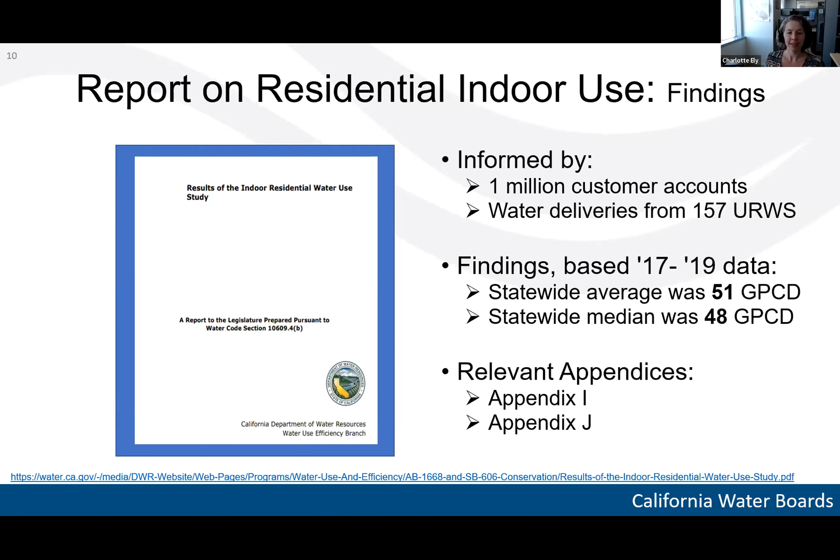Here, just quickly showing the recommendations made by the department and the State Water Board: that urban water suppliers would achieve an indoor water use efficiency standard of 55 gallons per capita per day by 2020, declining to 47 gallons per capita per day by 2025, and 42 gallons per capita per day by 2030 and beyond.

Before passing the proverbial mic to Joe and Peter, I wanted to recognize that regardless of what happens with AB 1668 and SB 606, wastewater collection systems and treatment facilities may continue to experience lower and more concentrated flows due to code standards and behavioral change.

Californians are expected to use water more efficiently indoors based on the 2017, 2018, and 2019 data that the department considered in the analysis. They projected that water use would continue to fall due to passive conservation, estimating that half of California would be at 44 GPCD or less by 2030.

An important consideration when thinking about that forecast is that passive conservation does not take into account the effects of existing conservation programs or of the actions people take when responding to a drought emergency. Some of those responses do lead to permanent indoor water savings.

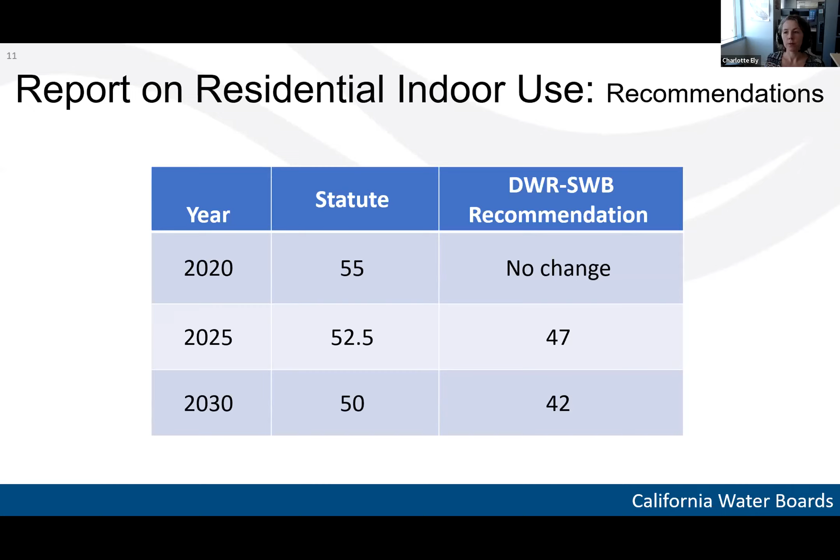And with that, I think we can move to the next slide. Peter and Joe, if you could introduce yourselves, that would be great.

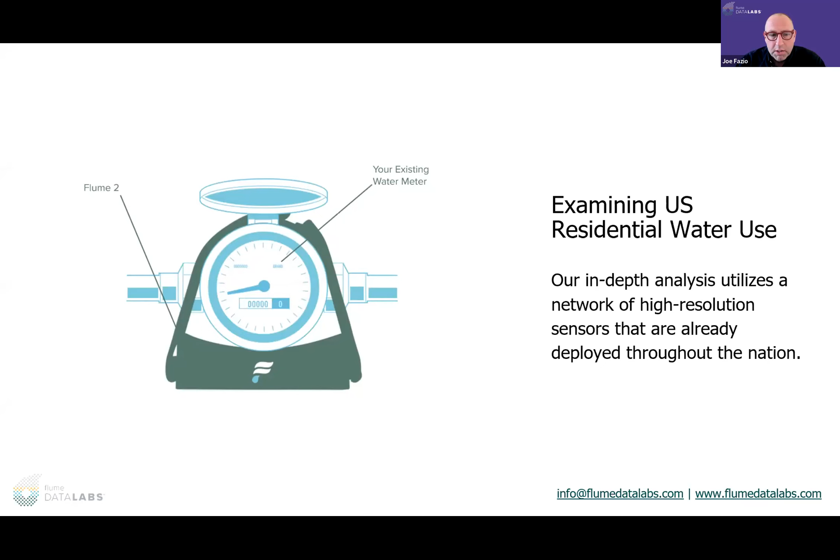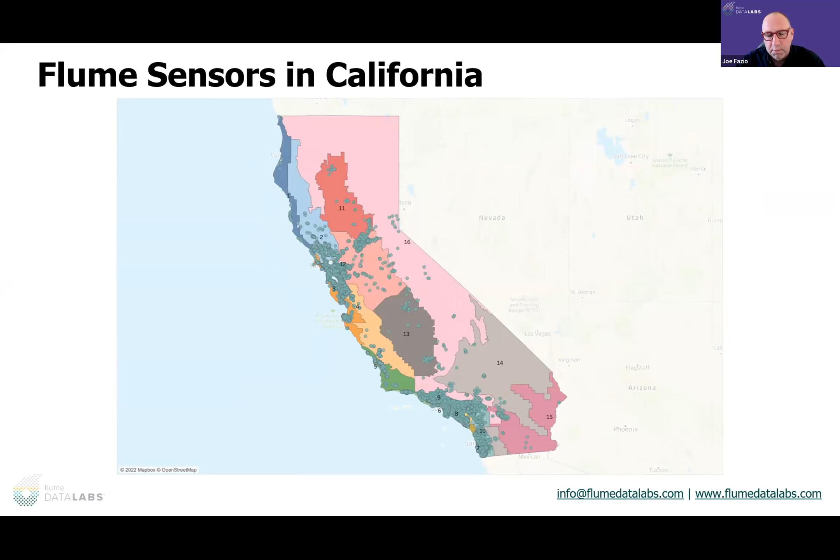Now that we have a lot of these flumes deployed all throughout California, over 15,000 flumes across the state, we can start to look at trends. These blue dots on the map show the concentration of flumes. We have high concentrations along the coast, since that's where most of the population is, but also good representation in Central California and in less populated areas. The different colors represent the different climate zones, and we have really good representation all throughout California, pretty representative of where the populations actually are.

So let's look at some of the data we're getting. It's important to look at California's average water use, but I think this slide tells the story better of what's going on with indoor water use in California. It turns out people in Los Angeles use water differently than people in San Francisco, and have different water use habits than people in Riverside.

So we mapped 3 different metro areas: Los Angeles, Riverside, and San Francisco. When I say Los Angeles, I don't mean the city itself, but the whole metro area including a lot of the outlying cities. Same for Riverside and San Francisco, which includes the Bay Area and Marin County. For each of those 3 metro areas, we plotted the average indoor water use per capita.

This is since basically the end of 2019. Along the y-axis is indoor GPCD, some of the numbers Charlotte just presented on her past slide, kept in the same units. On the x-axis is time, ranging from the end of 2019 to the end of March 2022, basically the end of the first quarter. These curves are pretty similarly shaped, however the magnitude is actually different.

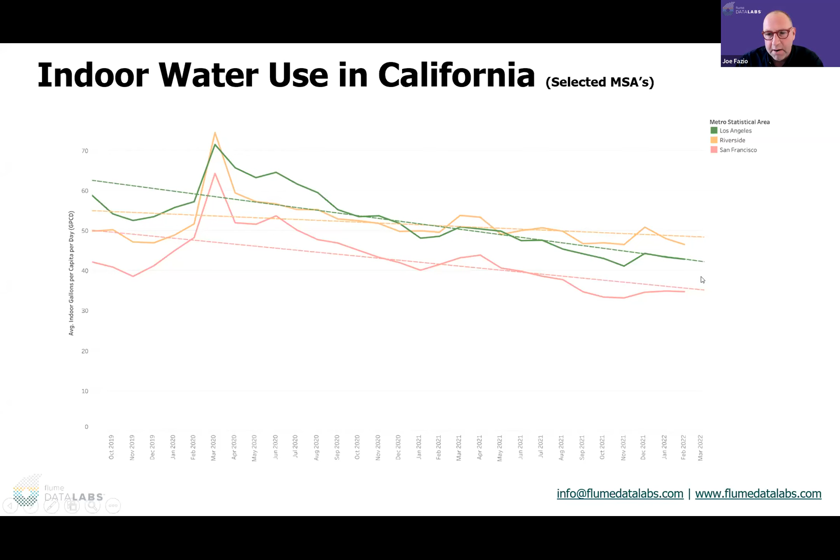Yeah, and I think this number has been driven down a little bit too, Peter. We have, as I mentioned before, a lot of these utility programs where there's severe drought pressure, especially the end of last year into the beginning of this year. And there was a lot of mandatory drought restrictions for people that actually do have flumes. So I think this is a little bit reflected here, but overall, we are seeing that this indoor GPCD is coming down across all geographic California.

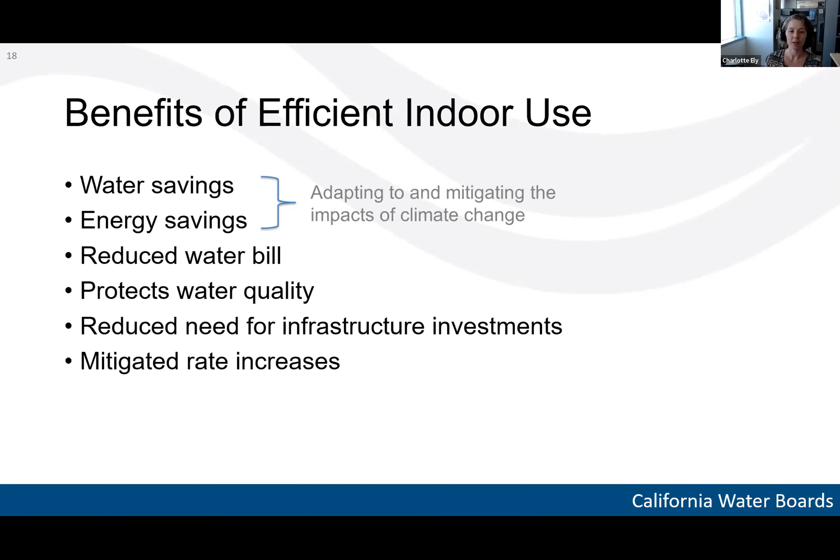So just in providing a quick overview of what this analysis did, I wanted to show what we evaluated and what we did not evaluate. And when I say we, I'm speaking on behalf of the really excellent team at CSU Sacramento and at different UCs throughout the state of California. It was a massive undertaking, and they deserve immense credit for the hard work they've done over the last few years. So even before describing this, thank you ahead of time, Eric, Harold, Caitlin, and the rest of the team for the really great analysis you've done.

So what did they do? One of the first really big pieces of this approach was to connect urban retail water supplier service areas to urban sewer sheds. This is something that hadn't really been done on a statewide level. There was some information in urban water management plans, but the extent of this effort was big, and there remains work to be done. But I think the researchers we've worked with took a big leap in a longer journey.

We basically ran, once we did that, for 335 wastewater treatment facilities in the state, for 410 collection systems that we could link to urban retail water supplier service areas, we ran different scenarios to consider how making conservation a California way of life might impact these facilities. We modeled how changes in influent flow rates might affect operations. We looked at whether or not these proposed efficiency standards might result in lower influent flow, might result in lower, more concentrated influent flow, or both. The team used survey results to scope the analysis and then also to benchmark the findings. And lastly, they estimated prospective operations and maintenance and capital costs.

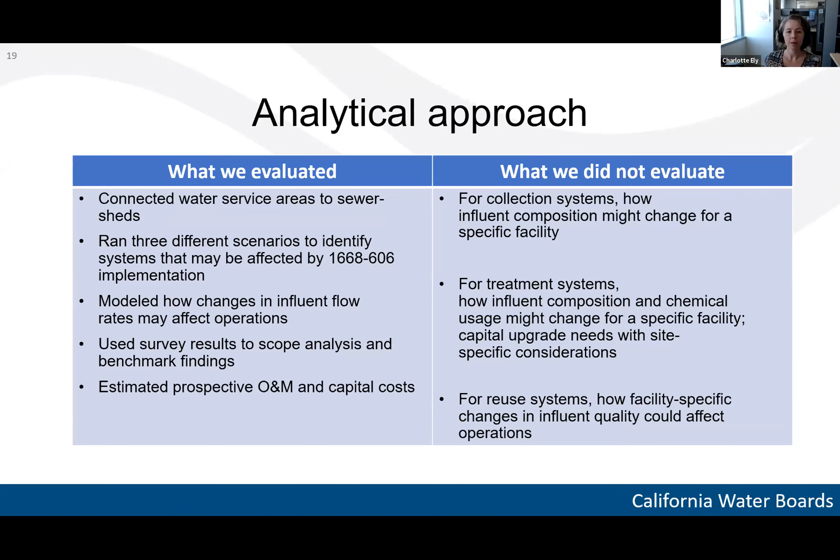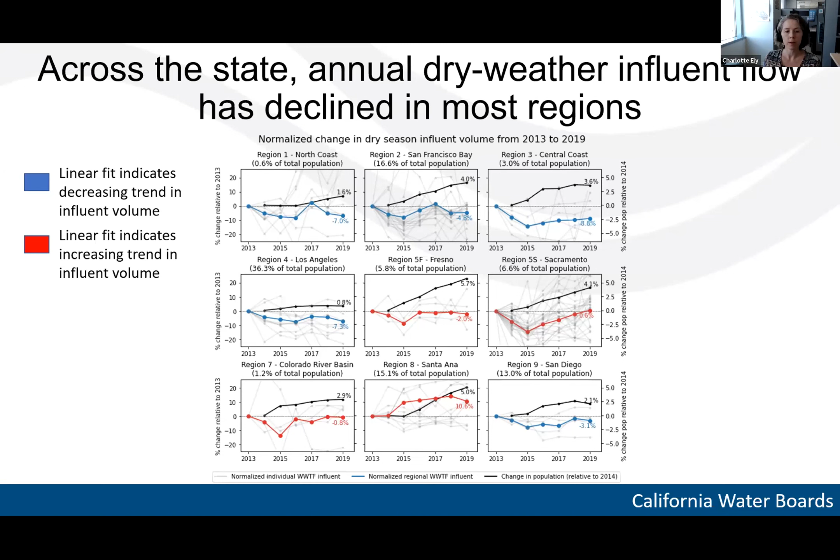Next slide, please. So here we're describing the three scenarios that we evaluated to think about how the proposed efficiency standards may affect local wastewater management, which we broadly considered collection systems, wastewater treatment facilities, and reuse facilities. So these are our three scenarios here.

When we looked at impacts, we looked at what might happen in 2030. Under scenario 1, we assumed that the residential indoor standard would be what was set in statute under the 2018 conservation legislation, that it would be 50 gallons per capita per day in 2030. As we can see, that's quite a bit higher than what we're observing currently, and it's about what we observed using that 17, 18, 19 data. So that was the piece of indoor water use, 50 GPCD by 2030 under scenario 1.

And then for the outdoor residential piece, we assumed that the outdoor budgets would be calculated assuming 100% of irrigable irrigated area at 70% of ETo. Now I know some folks have not been following the ongoing work on residential indoor, residential outdoor water use, and the standard for commercial, industrial, and institutional landscapes.

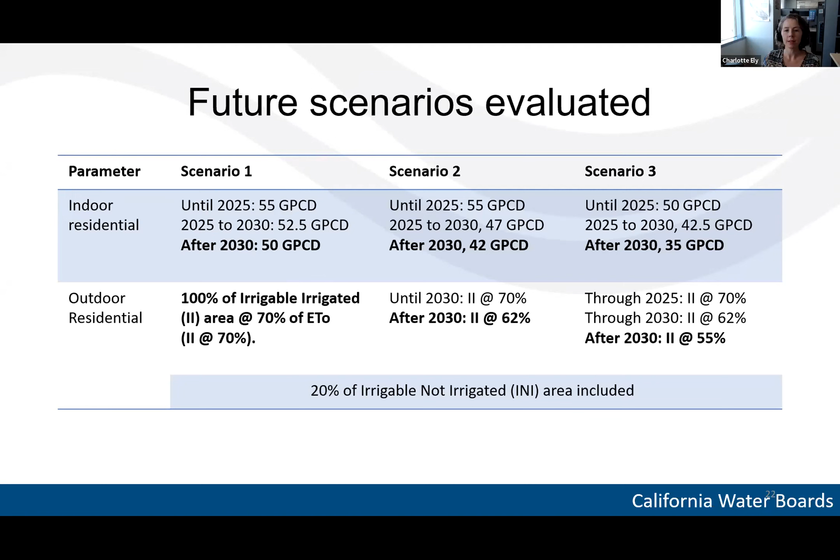Next slide, please. So this summary graphic is showing the percentage of wastewater treatment facilities that, due to AB 1668 and 606 implementation, may experience lower or more concentrated flows than what was projected by 2030. The 2030 baseline we compare the scenarios to is what we think future influent flows would be in 2030, absent the implementation of 606 and 1668. In other words, we took into consideration population growth and urban water use trends.

So here we're looking specifically at scenario 2, and we'll continue to focus on scenario 2 for the rest of my brief presentation. As a reminder, that was 42 GPCD for the residential indoor standard, 62% ETo for the outdoor standard. In case folks are interested, the preface we made available on our website yesterday afternoon includes a summary table for each of the 3 scenarios that we evaluated.

What we see here is that under scenario 2, 61% of wastewater treatment facilities may experience lower or more concentrated flows than what was otherwise projected by 2030. That's the top line number that you see. And then at the left, we see that 38% may experience lower total influent volumes.

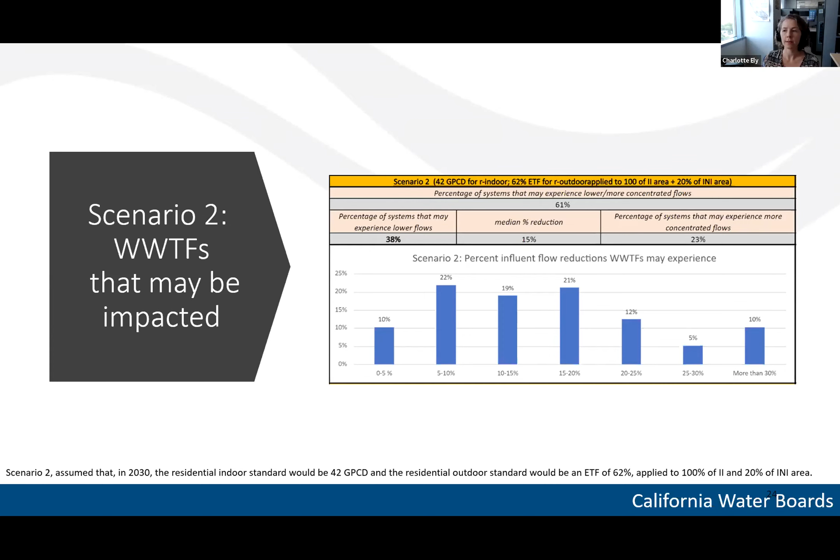This is a summary graphic showing the percentage of collection systems that, due to 1668 and 606, may experience lower or more concentrated flows than what was otherwise projected by 2030. Under scenario 2, 62% of collection systems may experience lower or more concentrated flows, and 45% may experience lower total influent volumes. 11% may experience influent flows 0 to 5% lower than projected for 2030, and so on. Half may experience flows 15% lower than projected by 2030. And 17% may experience more concentrated flows, but not necessarily lower influent flows.

Once again, this is really a first order look at which collection systems might be impacted, and the degree to which they might be impacted. The CSU team will take a deeper dive in just a few minutes.

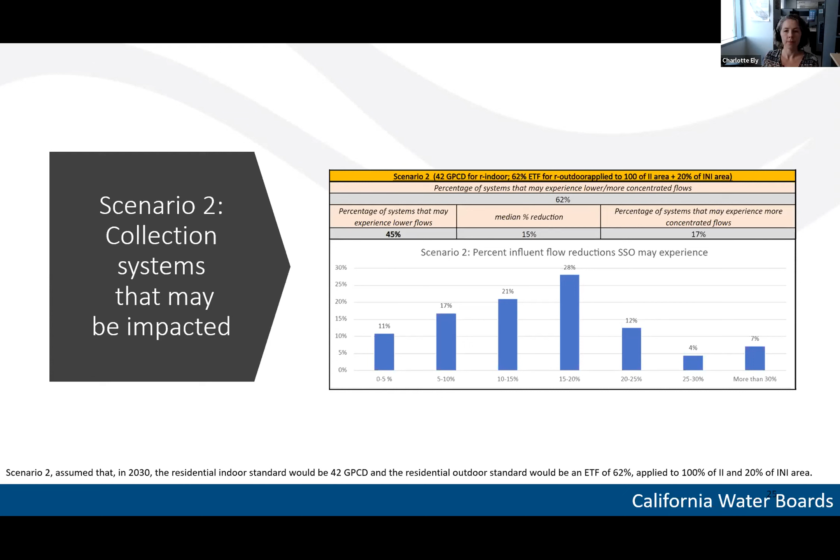Before explaining this graphic, I wanted to recognize, as board member Morgan did, that wastewater treatment facilities and collection facilities are facing multiple challenges resulting from the combined effect of not just aging infrastructure, but changing influent characteristics, topography, and climate change. We recognize that changes in influent flow and higher concentrations from water use efficiency and conservation can exacerbate these operational changes. We're seeing that in some of the data too.

That said, we thought it was important to contextualize the findings shown in the previous slides. Those previous graphs compared a future 2030 baseline to what influent flows might be under scenario 2. Here we're comparing historic influent flows to the theoretical flows under scenario 2. For the 335 wastewater treatment facilities that we have decent data for, we asked how many times has influent historically dropped below the volume forecasted under scenario 2.

Looking at the last 10-ish years that we have influent flow volumes for, we see that 33% have not experienced annual average influent flows akin to those under scenario 2, but 67% have experienced equivalent influent flows at least once, and 44% of agencies have experienced similar influent flows more than 3 times in the last 10 or so years.

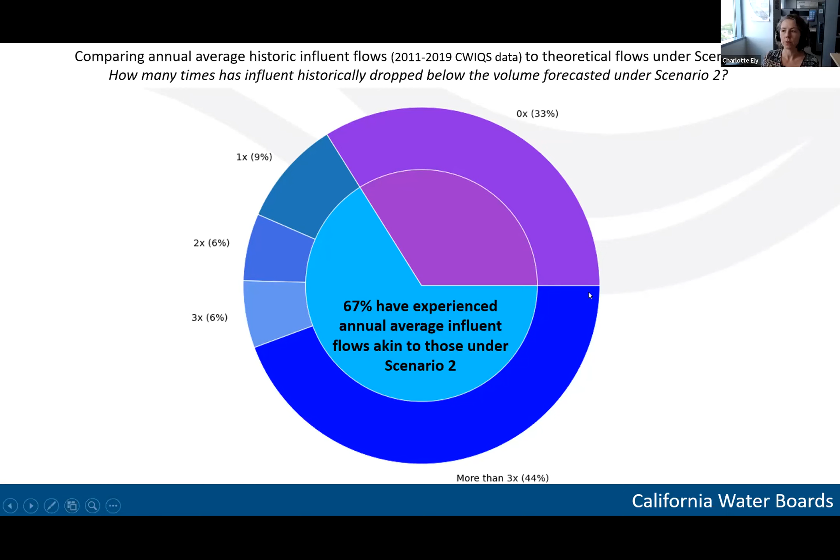Now we're going to pivot to a few examples. In this graph, we're showing a lot of different data points, so please bear with me. On the y-axis, we're showing influent in millions of gallons per day, and on the x-axis are years.

The light blue line shows historical influent from 2011 to 2020. The yellow dashed line up top is the volumetric design capacity. The purple dashed line represents where we estimated the 2030 influent flows would be absent 1668-606 implementation. The black dashed line represents the projected influent flow under scenario 2. Comparing the black and purple dashed lines, we estimated that for this particular facility, influent flows might be reduced by 5.9% come 2030.

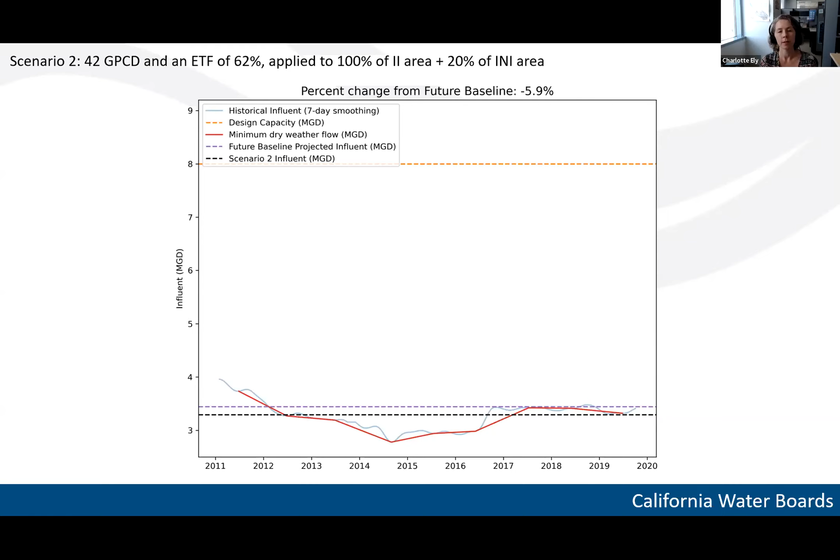Note that this particular facility has already experienced influent flows equal to and below the volume projected under scenario 2. This doesn't mean that increased water use efficiency will be a walk in the park for this facility, but rather that the agency and its staff have worked through these conditions before and may be well equipped to manage and respond to the lower and more concentrated influent flows that are likely in the future.

Referring back to those previous slides, this facility would have been counted as one of the 22% of wastewater treatment facilities that may experience reductions in flow under scenario 2. In other words, in this instance, our analysis may be providing a pretty conservative estimate of prospective impacts.

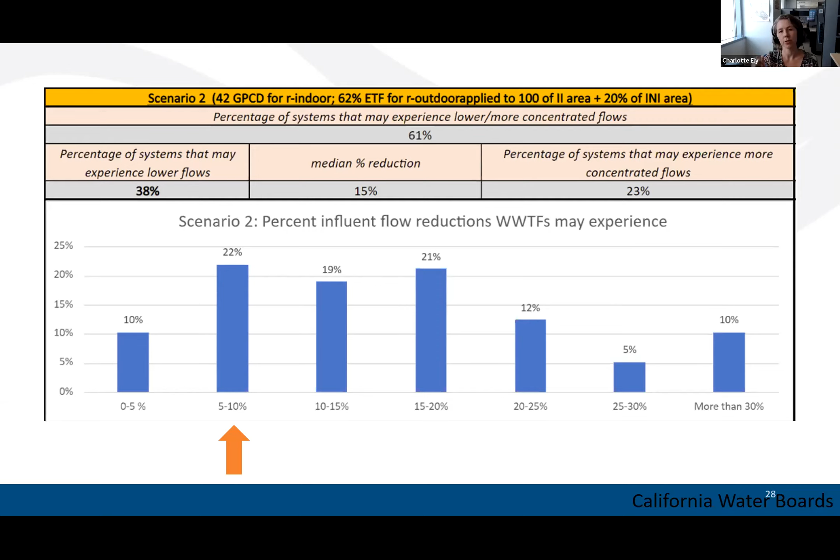Again, 67% of wastewater treatment facilities have experienced annual average influent flows akin to those under scenario 2. This is in part due to the state's history of droughts, which climate change is intensifying, and, as we've seen earlier in this workshop, that residential indoor water use has been falling.

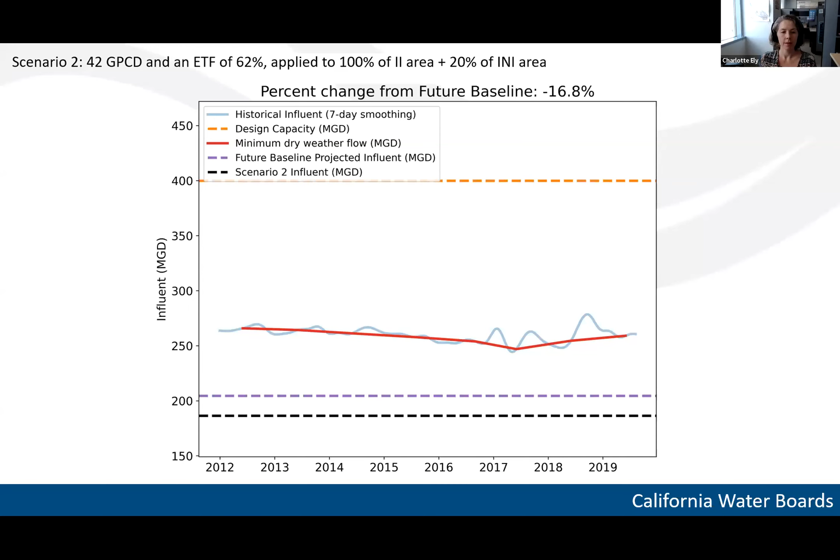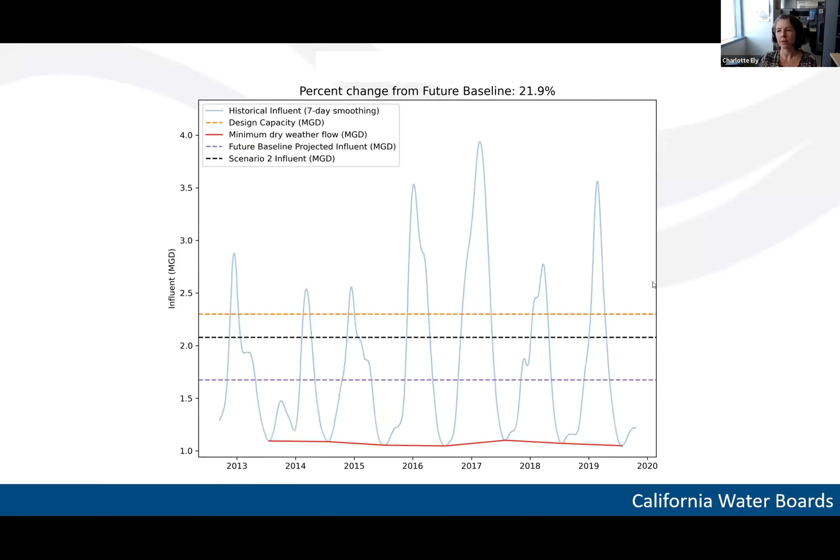Here's an example of a facility with wet weather flows exceeding even design capacity, but for which dry weather flows are well below those projected for 2030 and forecasted under scenario 2.

In sharing these, I wanted to give stakeholders, specifically our wastewater stakeholders, an idea of the kind of analyses that we're running, what we're considering, and we welcome the opportunity to continue working with you to refine the data we have to make sure we make the best policy decisions that we can.

With that said, I'll get ready to pass it over to Erik Porse and team, and just acknowledge that we're looking at quantities here. As we'll hear later in the workshop today, these are also issues about quality and concentration. With data regarding changes in influent water quality, I think we'd have an even better understanding of the kind of challenges that facilities are currently experiencing and what they may experience in the future. So I guess that's it for me, and thank you again for your time.

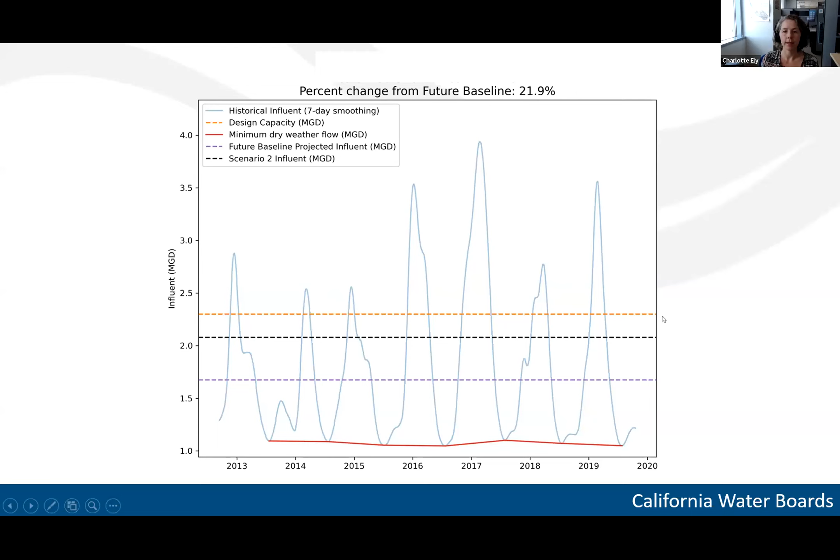And I'll pivot now to the CSU team.

Thanks, Charlotte, I appreciate it. Hi everyone, on behalf of the team, my name's Erik Porse. I'm here today with Caitlin Leo and Harold Leverance, and we'll be presenting our findings primarily on the Task 5 reports, which were reports of environmental effects. But this was part of a larger project across multiple universities.

We had a fairly large scope because urban water management touches a lot of different aspects of our lives in California. We were evaluating effects on urban retail water suppliers, including costs and benefits and effects on low-income communities. We were evaluating effects on wastewater management, including conveyance, treatment, and reuse. We were evaluating effects on developed and natural parklands, many of which have water provided by urban retail water suppliers, and finally effects on urban trees specifically. The last three bullets were related to specific sectors of life in California identified within AB 1668 and SB 606 for evaluation. The first sector, urban retail water suppliers, was the potentially directly affected sector from the legislation, so we evaluated both the environmental and economic effects. Today we'll primarily focus on environmental effects, specifically the wastewater management community.

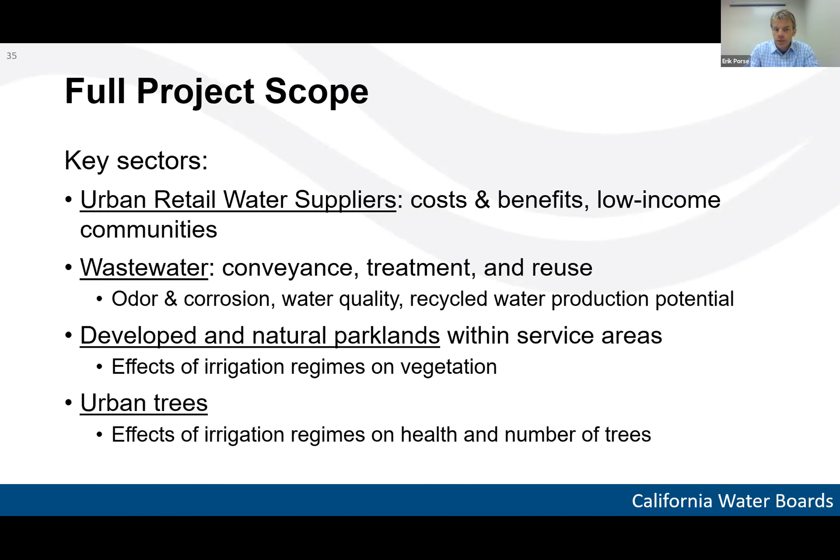We presented the full project team in a little more depth in December, but to reiterate, this involved Sacramento State, the Office of Water Programs, Department of Civil Engineering, and Department of Economics, UCLA's Institute of the Environment and Sustainability and Department of Biology, UC Davis's Department of Plant Sciences Urban Ecology Lab, and Humboldt State as well.

We discussed this also in more depth in December, so I encourage you to revisit that presentation. But to give a quick overview, one important aspect of this analysis was considering not only what's happening now, but what's happening essentially 10 years from now. Since the legislation is being implemented through 2030, we had the task of evaluating what changes would occur through then. To do that, we had to understand what we call the future baseline—as Charlotte alluded to, the situation in 2030 for water supply, wastewater management, urban landscapes, and so forth, in the absence of AB 1668 and SB 606. This is where considerations came in of sociodemographic and population changes that influence water use, drought, ongoing fixture efficiency from code and incentive-based replacements, and outdoor water use efficiency with turf replacement.

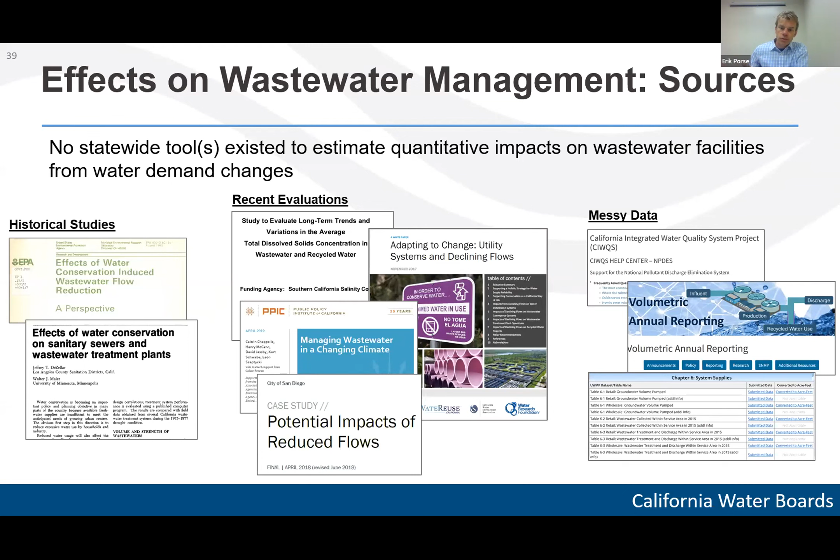There's also the new volumetric annual reporting, which hit the street during the course of our project, as well as a number of information tables within DWR's urban water management plans. There's other data sources, including the wastewater user charge survey, and there's even data from the Department of Finance. So we had to try to put this all together, building on past work, to get to a more statewide picture of potential effects.

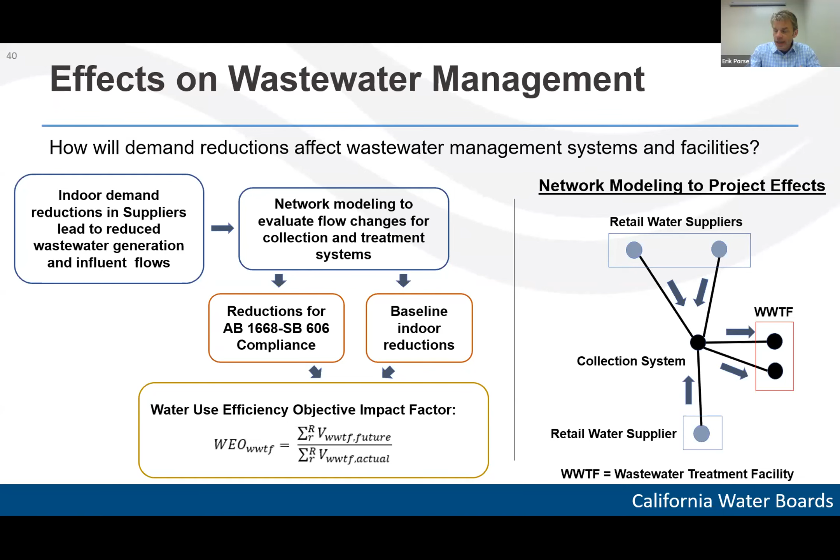Once we identify how to at least move water through these linked urban systems, then the question becomes: what level of precision and accuracy can we project for different types of water quality or water flow outcomes?

This is a diagram of how we moved through trying to integrate these data sources, and I should emphasize a lot more work needs to be done here. There are still some major pieces of data that could help shore up what these future projections would be, but it's at least an empirical tool that we have now.

Using the California Integrated Water Quality System, we identified the total number of treatment facilities, about 1,300. Of those, facilities with design flows in the system number about 1,200. Then moving to facilities more likely to supply larger urban retail water suppliers, that's about 800 or so, with more than 20,000 gallons per day of capacity.

About this time is where we made it, after about a year. And then we discovered what we affectionately called the Rosetta Stone, which would be DWR's urban water management plans, which has some excellent tables providing the linkages for this network modeling. So we were able to bring together all this information, but the problem is the tables in DWR's 6.2 and 6.3 didn't necessarily use common identifiers with the other data sets that were reported. So a lot of our effort had to go into trying to put this all together, to the best extent possible, to project the potential effects at a system level.

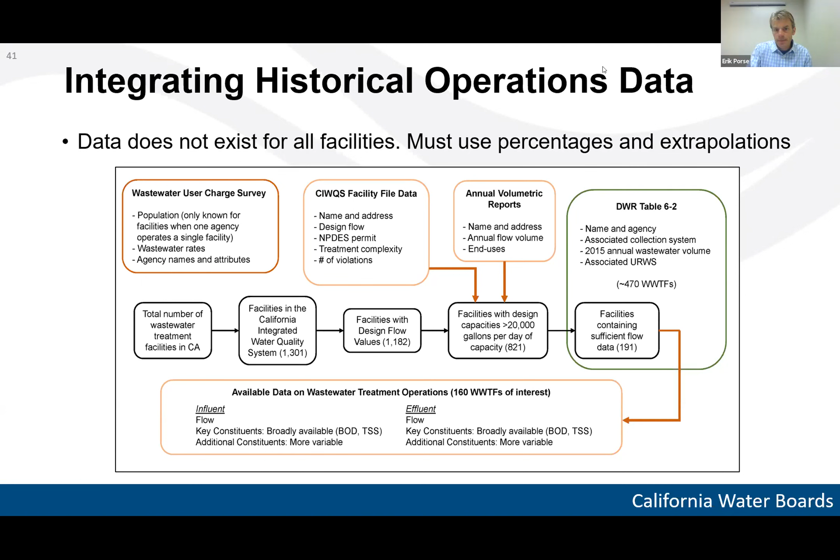One note to preface here: what my colleagues Caitlin and Harold will speak about is the consideration between lower flows and concentrations, which would be familiar to any process engineer. In this context, to project the effects of wastewater management, we have to incorporate changes in flow, population, and concentration over 10 years, and think about it in relation to where a facility is currently operating.

What is its current design flow and average influent flow? If you're looking at changes over, say, one year, it's likely the population didn't change much for that facility—maybe in some areas with growth. But if you're looking over 10 years, you could have significant changes in population.

Historically, going back several decades, what we tried to frame in the reports is that facilities last a long time—we build infrastructure for a long time. Historically, the design metric for influent flow was about 100 gallons per capita per day. So if a facility was designed several decades ago for 100 GPCD, and it's now operating closer to the current water use standards of 50 or 55 GPCD, you'd have a corresponding increase in influent concentration. At 100 GPD, you might be designed to manage 200 milligrams per liter of the core constituents, and when you reduce down to 50 GPD or even lower, that concentration certainly increases.

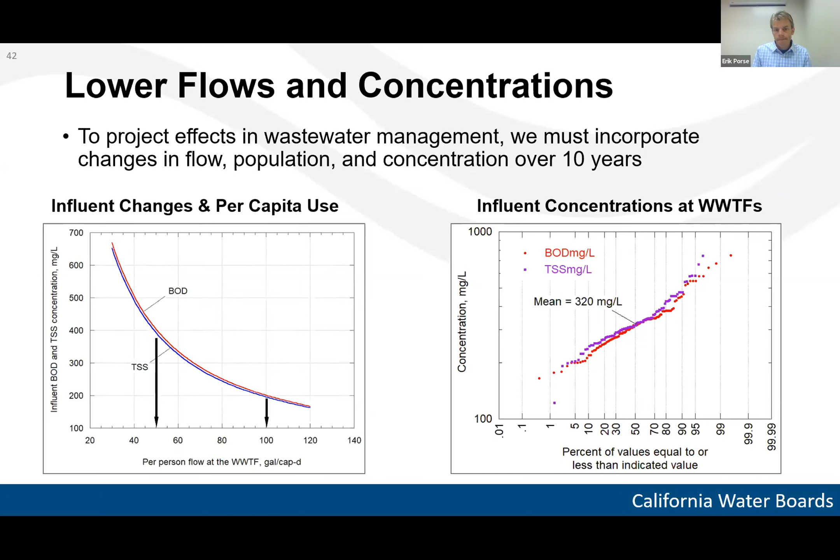For the last slide, I'll discuss an effort we had for outreach with the wastewater management community. I'll thank all the clean water agencies and industry organizations - CASA, SCAP, BACWA, CVCWA, and California Water Environment Association. They helped us organize a series of outreach efforts with questionnaires, evaluations, and in-depth interviews with particular facilities. This was incredibly helpful for a few reasons.

First, this helped us learn more about effects and see how those effects may have changed from some of the 2012 to 2016 evaluations, if they had changed. It helped us scope our analysis and put boundaries on what we might or might not be able to say. It also helped us benchmark findings from the modeling and extrapolations we were trying to do in a relatively compressed research timeframe.

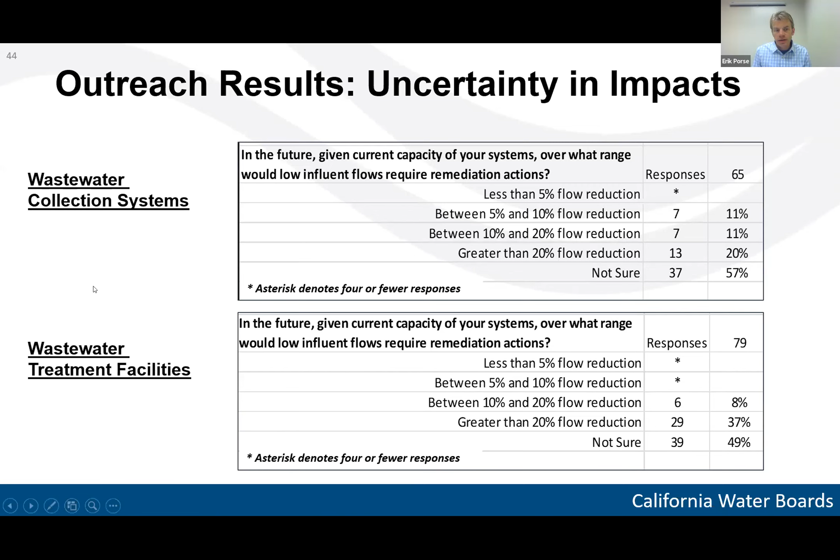All right, so as Erik said, we wanted to take a look at the impact of flow reductions on the collection system. Some of the main low flow effects we were looking at were increased deposition of solids, more frequent blockages in pipes and lift stations, increased hydrogen sulfide production which would lead to an increase in odor complaints, as well as corrosion, root intrusion, and a reduction in pumping efficiency.

What we were really concerned with was the collection system responses to these impacts, such as increased labor, increased chemical usage, changes in energy use, and additional equipment needs, as well as increased repair and replacement, specifically due to the increased corrosion rates. All right, next slide, please.

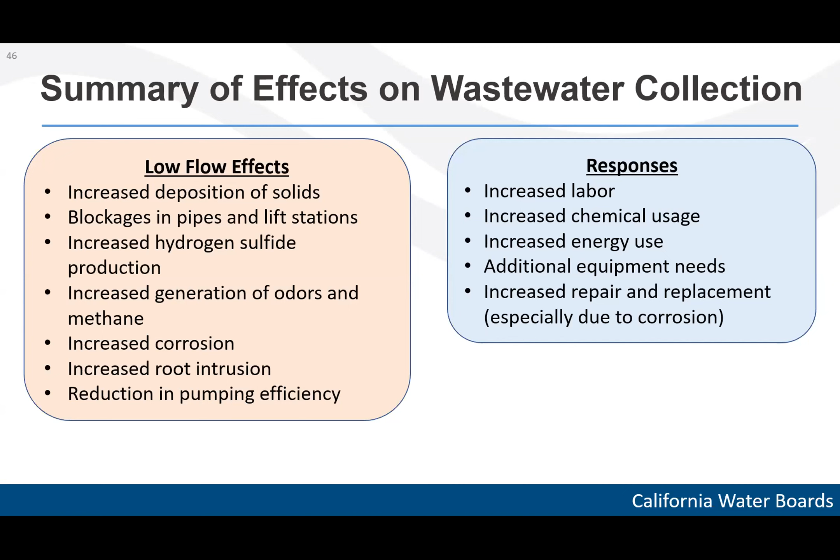So in order to kind of put numerical values behind some of these effects, we developed an Excel-based model that essentially takes a lot of different equations and modeled processes available in literature and combines them into one model to have a more holistic look at what's happening inside the collection system.

It takes a lot of individual processes that are pretty established in literature, such as flow velocity in the collection system and H2S production, and combines them into one larger model. It takes general collection system characteristics, such as population, influent flow, miles of pipe size distribution, and temperature, and uses those as inputs to predict the collection system influent concentrations, then models processes like flow velocities, H2S production, and corrosion rate, which were some of the most important ones we looked at.

One thing that's important to note about this model is it takes a very conservative approach. For example, when plugging in a temperature, we used a collection system's average summer temperature, so it's kind of a worst case scenario, which is important to keep in mind.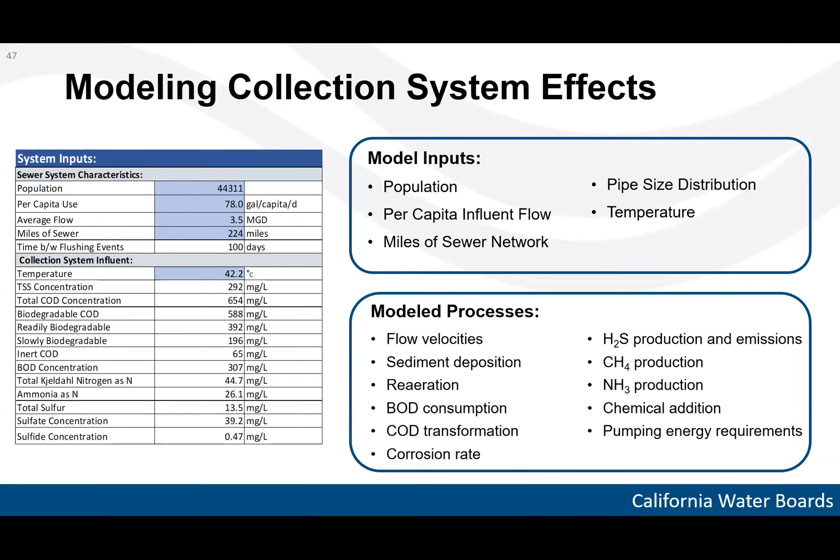Some of the key outputs of the model were the average sediment depth, average corrosion rate, and H2S emissions per mile. These were used to estimate values for some of the responses we were talking about earlier, such as annual chemical costs, annual pipe replacement costs, and pumping energy.

The model was run for about 50 systems, which were chosen based on data availability, as well as varying them by population served and by region in California.

Once we ran the systems, we were able to plot each of the model outputs, so the percentage change in, for example, corrosion rate over the percent decrease in flow. We ran each system at its current flow and decreased it by 25% in increments of 5%. From these, we were able to get incremental changes, which you'll see on the next slide.

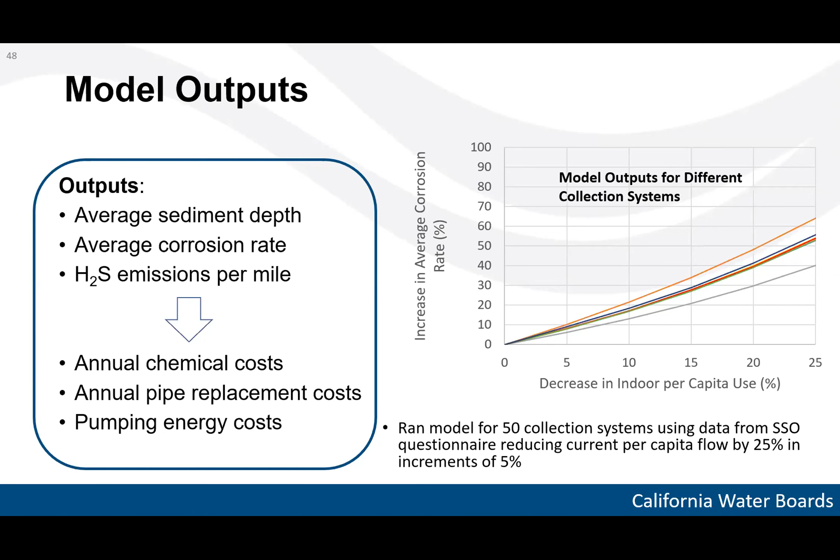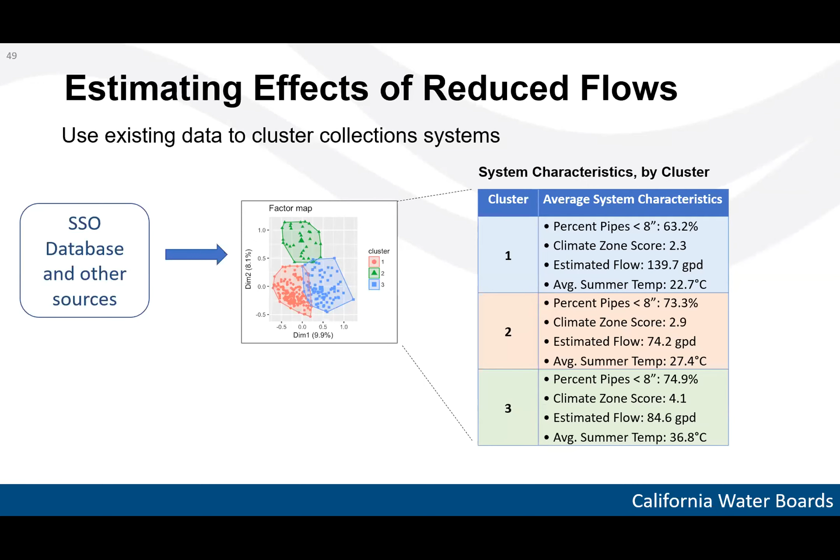Alongside this, we used data from the SSO database, as well as some of the outreach responses, to group the collection systems into clusters based on collection system characteristics we had identified as risk indicators. The ones we ended up grouping them by were the percentage of pipes with a diameter of less than 8 inches, their climate zone, their current flow, and their average summer temperature. From these, we came up with 3 different groupings that assess the risk of each collection system.

As I mentioned, the model outputs gave us incremental changes, which were a lot more easily applied to the predicted flow changes. For example, for collection system 1, for each percent decrease in flow, the model predicted a 1.98% increase in corrosion rate and a 0.34% increase in H2S emissions. We had these results for all 50 systems.

Because we weren't able to run the model on all the systems due to lack of data availability, and because it being Excel-based made it pretty time consuming, we took the clusters we developed and assigned each of the 50 systems to a cluster, then created an average incremental change for each of the model outputs for each cluster. This was really helpful because then we could apply it to the statewide collection system data.

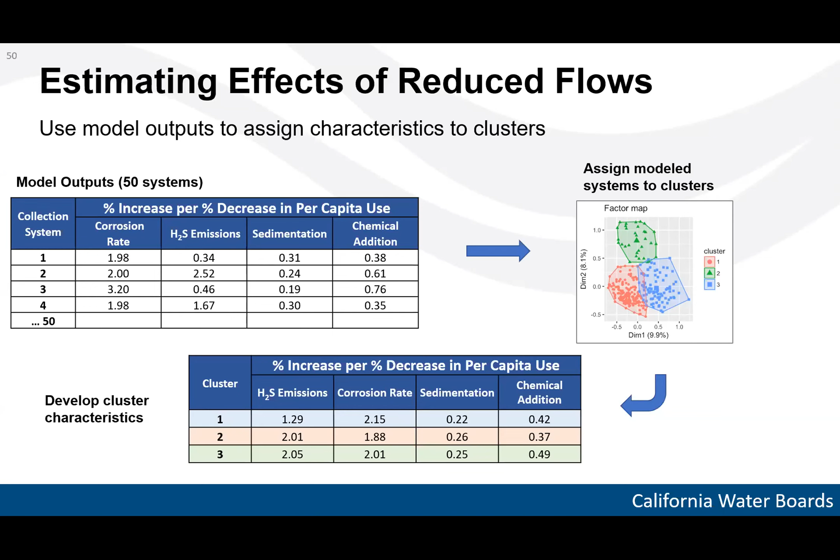That was how we tried to put some numerical values behind the collection system impacts. I'm going to turn it over to Harold, who's going to talk about how we did that for the wastewater treatment facilities.

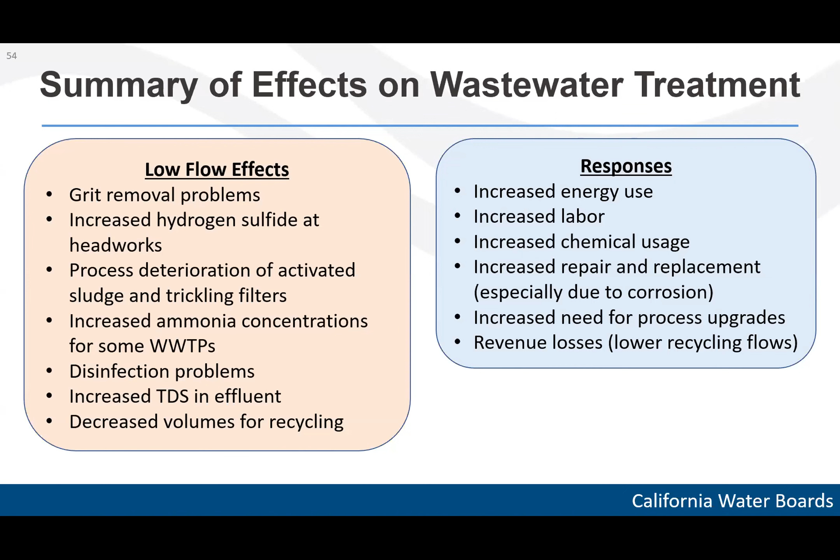As Caitlin said, for the wastewater collection systems, we developed an Excel model, and we programmed in the various processes we thought were relevant. For the wastewater treatment facility modeling, we use a different approach. We use a commercial model, in this case BioWin, which is a commonly used model for simulating wastewater treatment processes. What we did is we looked at the most commonly used types of wastewater systems used in California for larger facilities.

We looked at, for example, the conventional activated sludge process. We looked at activated sludge process with ammonia removal. And we looked at an activated sludge process with total nitrogen removal.

For these three model configurations, we looked at the influent we'd be expecting from the wastewater collection system models that Caitlin presented. For these different wastewater collection system models and the spectrum of different influent concentrations we might be expecting, we asked how that would impact these different types of wastewater treatment systems. So we took the wastewater collection system data and used that as an input to the wastewater treatment models, looking at different flow and concentration ranges.

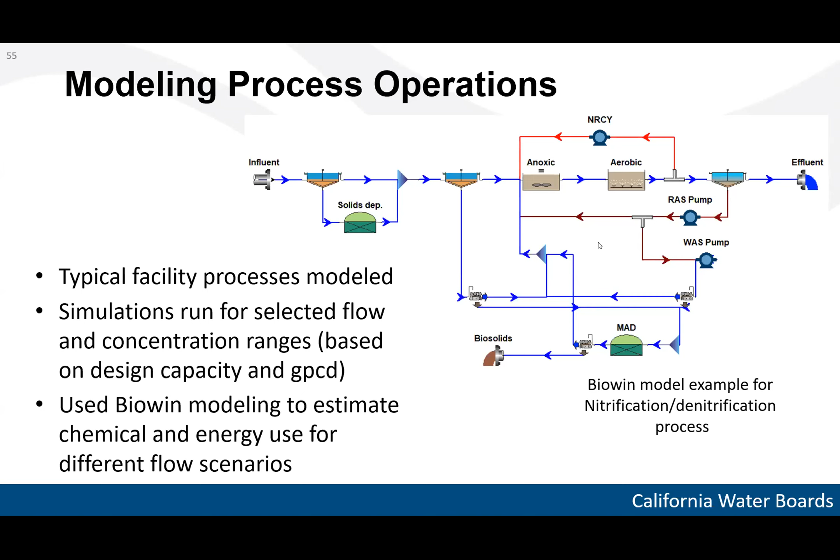In general, it looked like the increase in energy could be about 10% for the half of facilities that are affected. Facilities that might see a decrease in energy would be due to reduced flows and reduced concentrations, which could be relevant for some areas. In those cases, the average change was about a 7% reduction in energy usage.

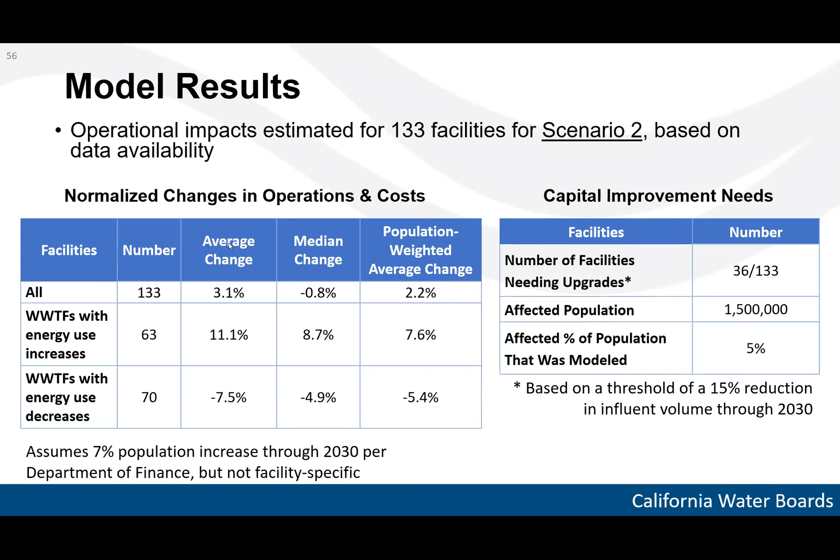The types of capital improvements we're talking about, and why they're needed, in general relate to changing influent conditions—either the flow rate or the loading—which increases the need to upgrade these facilities. So basically, facilities are reaching the end of life much faster than expected because the design assumptions are changing from what was originally intended.

What we find is that old aeration systems basically aren't able to provide air at a rate sufficient for wastewater treatment, so they need to be upgraded. We found that trickling filters have limitations about oxygen transfer that affects their ability to handle concentrated flows. We found that nitrogen removal systems can't meet effluent standards without increasing chemical addition or pumping energy input, so systems removing nitrogen are especially at risk because concentrated flows increase nitrogen and make it harder to meet permits.

Operation and maintenance needs are basically increasing proportional to the concentration of the flow. So as the gallons per person per day decreases, the energy and capital input needs are increasing. The shorter lifespan for these facilities increases the life cycle costs, because a lot of times these facilities are designed for a 30 to 50 year planning horizon. So if we're having to make changes after only a few years, or after decades instead of the planned lifespan, that definitely increases the costs for the life cycle of these facilities.

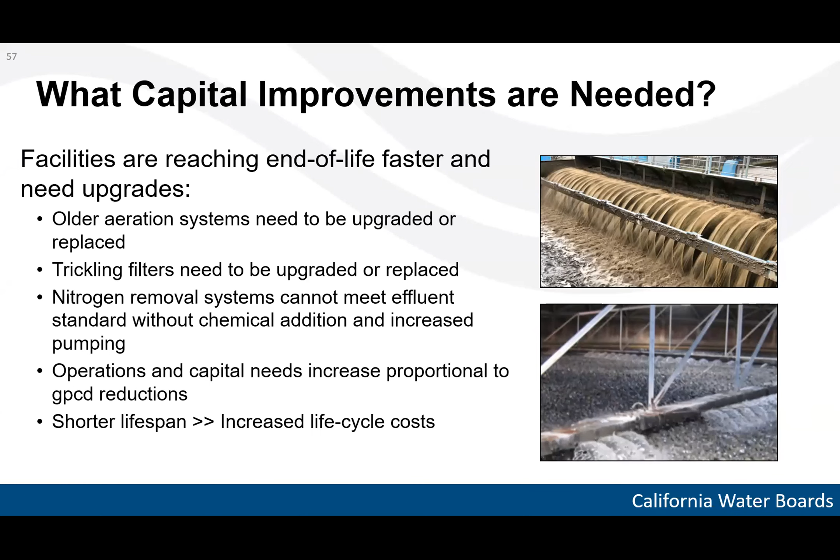We also looked at water reuse facilities in the sense of the flow balance, mostly to see what facilities that are already doing water recycling now could see a reduction in their influent. As Eric presented earlier, if we just look at the baseline reduction in indoor water use, the estimate for that was about 21,000 acre feet of reduction just due to people's natural tendencies to save water.

Comparing that to scenarios 1, 2, and 3, we can see that as we get to the more extreme scenarios, we could potentially start to see net changes up to 45 or 62,000 acre feet over the 5-year period. In terms of overall water reuse, that's just a few percent of total water reuse, but it is significant and impacts a few facilities, in particular, the ones that are using a lot of their water already.

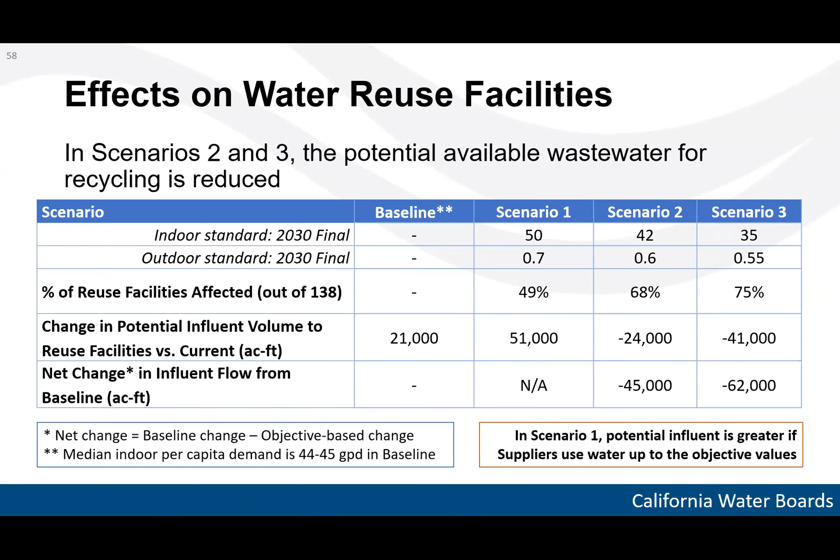But it's important to compare the savings that we are going to see in total influent to wastewater treatment plants with the total savings of water supply that we're seeing in general. If we look at the 3 scenarios we have here, the savings we're talking about, for example, for scenario 2 is 500,000 acre feet per year in the year 2030. If you compare that to how much water is potentially going to be diverted from recycled water programs, it's about 5% of the value. So overall, much less reduction in recycled water than there is in total water savings on the water supply side.

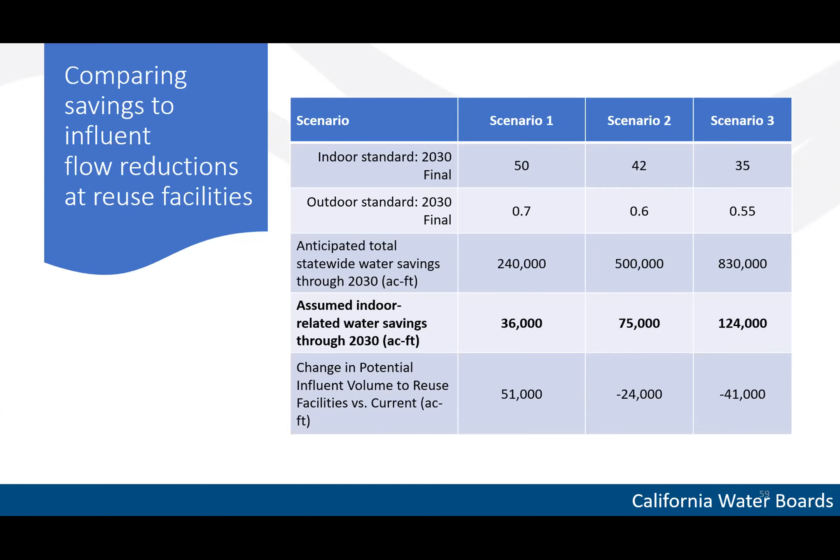So just to summarize some of the key themes that we've discussed here: the wastewater data we have is a big challenge in the sense that there are disparate databases that haven't been integrated yet. That's one thing that needs to happen so we can really improve the quality of the data we have to work with here.

Impacts from lower flows are extensive. They're already happening, they've been happening, and they're going to continue to happen, and the effects are going to be different at every site. Most wastewater treatment facilities have already experienced low flow impacts, and a lot of other facilities aren't sure what the future is going to be because they were never designed for what's going to be happening coming up. It's the same thing for the collection systems—there's a lot of negative impacts occurring with underground infrastructure, and that's a significant concern because of the cost to manage underground infrastructure.

In terms of adaptation, there's already a lot of actions occurring, but basically every facility could need to potentially be upgraded for more concentrated wastewater flows, and certainly it's going to require more energy. A lot of wastewater treatment facilities are reaching the end of their life faster and are going to need to be upgraded or replaced.

Finally, for recycled water programs, there are already some recycled water programs that can't provide the amount of recycled water they plan to due to flow reductions. This is already happening in California. The salt buildup in recycled water due to water conservation is already affecting the ability to use recycled water for irrigation in some areas. So these are all large-scale impacts that are going to have effects for a long time.

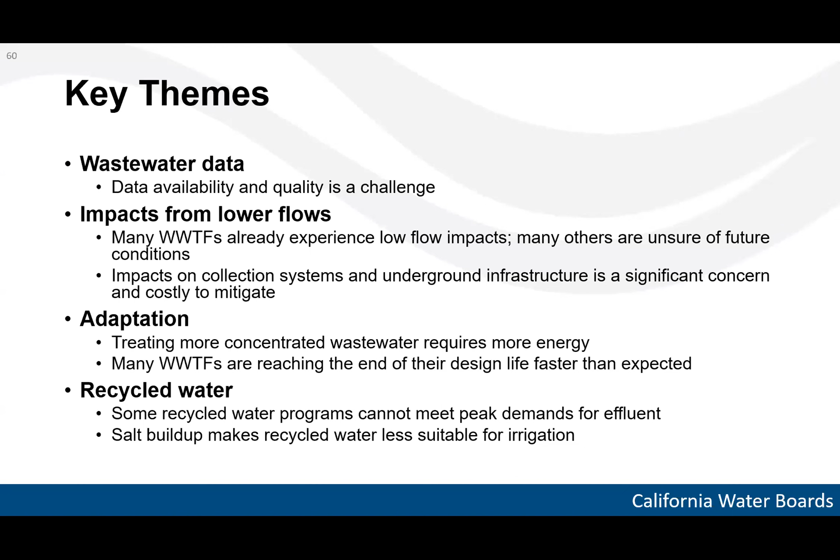Next slide. I'm going to hand this off to Eric to talk about some of the cost implications.

Thanks, Harold. So to wrap up our portion of the presentation, today we discussed a lot about environmental effects under the rubric of policymaking, but another task of the project was to evaluate economic effects, benefits, and costs. Throughout this component of the work with our wastewater evaluation, we had our economics team, including Jonathan Kaplan at Sacramento State and Eric Eschker at Humboldt State, working alongside our process engineering folks, which was incredibly helpful.

There's a lot of rubrics in the wastewater industry for evaluating costs, especially for a particular system—we do preliminary engineering reports and so forth. When you try to bubble and boil those costs up, given all the uncertainty we've talked about today, it became more of a challenge.

So we took sort of parallel but slightly separate approaches, looking at annual treatment costs. We were able to work from per capita spending derived from Department of Finance data, but also thinking about different process effects using unit costs from literature. You can see that for scenario 2...

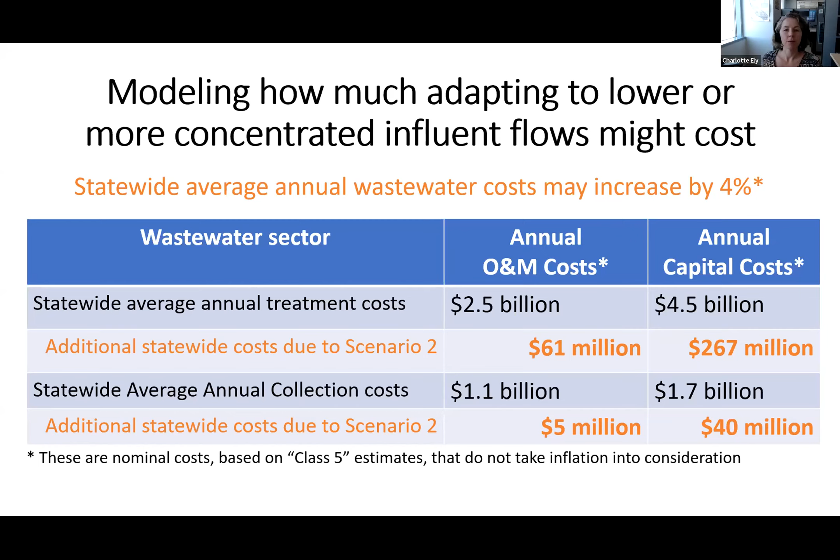Okay, so Alex Mackey asked a question for the Sac State researchers. Reducing TDS is a priority for all parties. If lower flows increase the need for the WRRF to remove TDS before discharging, which technologies do you recommend to bring it down to meet the permit? And I wonder if Eric, Caitlin, or Harold is available to answer that question.

I can help out with that question potentially. I think generally TDS isn't like the regulated constituent that we're thinking about, and most wastewater treatment facilities don't remove TDS because you have to use something like reverse osmosis. So we wouldn't really be doing that unless it was absolutely necessary, for example, if we're going to drink the water again, or there's some other particular application that required high purity water. So basically, we just have to find plants and crops that can adapt to the higher TDS water, or find lower TDS water supplies to use in the first place. And also think about the stuff we're putting into the water when we use it, because that's what's adding the TDS to the wastewater in the first place.

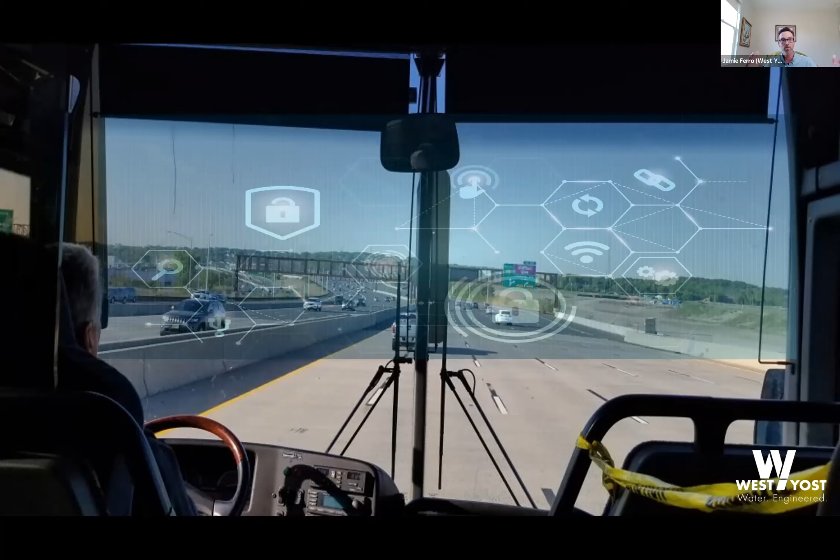But given that high strength sewage, drought and conservation only represent one chunk of dirt, mud on the windshield, there's a variety of challenges they face day-to-day. To provide that clarity is really going to take advanced tools and better metrics, better data visualization capabilities, so that the bus drivers, the wastewater plant operators dealing with these challenges, are better equipped to deal with the future.

That's one of the challenges we see, just not a lot of really good data to help guide decision-making processes. Instead, we're seeing a reactive culture of dealing with problems as they come in, scrambling to fix them, not having a big enough budget to deal with all the challenges they're faced with, and being compromised in how they deal with those challenges.

We're then going to turn it over to Matt Anderson, the lab manager at City of San Luis Obispo, who'll talk about what they're dealing with in their city, and then over to Vince to wrap us up. I know we're behind schedule, but I checked with the organizers and we're going to try to stick with the allotted time to give you the perspective of Matt and Vince.

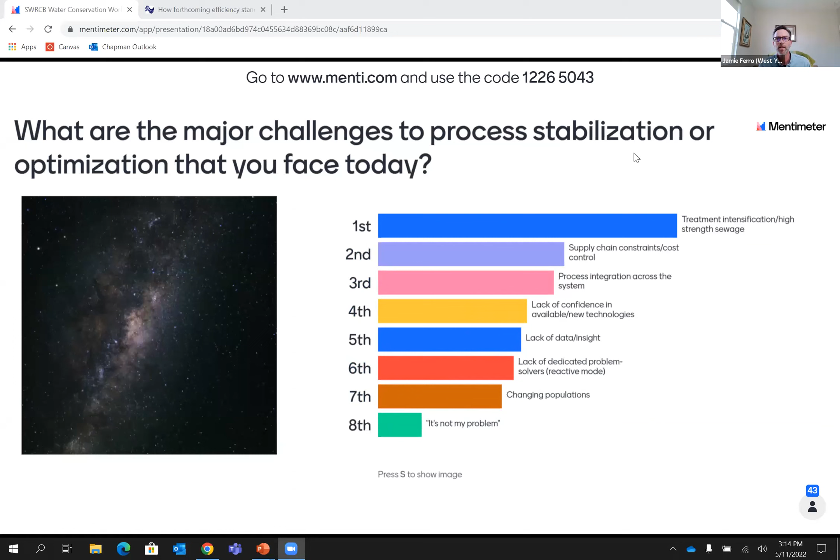So I guess this treatment intensification, maybe we're a little biased. We've just learned about a lot of great data being put together and advanced in this issue. One observation I'll make is focused on some of the energy challenges that result - we've seen this occurring for the last decade, and the resulting process strategy is just more air, more aeration energy, more pumping energy. A reliable and available power supply is not necessarily going to be a foregone conclusion. We'll actually have to work to have reliable power supplies within wastewater organizations.

I'll go to one more question here, then we're going to turn it over to Wyatt. So what is one word that describes conditions you don't expect to change in the future? This is a word cloud. Just something that comes to mind - there's lots of change we've been talking about. What do you expect won't change? Wyatt, you want to navigate this word cloud as some of these things start to emerge here?

Okay, this is a visualization concept we came up with several years ago - connecting the dots. We tend to drill in on specific items of interest, and in many cases we don't see how these are interconnected. So what I'm going to try to provide here today is just a very high-level concept of what we mean by connecting the dots and the significance of this, using different analogies in that process.

We only have just a very few slides. We don't want you necessarily making a whole lot of notes that are going to be hard to remember. What we really want to do is give you some concepts and questions that might be hard to forget. You're going to walk away from today thinking about a few things in a totally different way than what you're used to, using some very common vocabulary, but asking questions about it in an uncommon way. So we want to leave you with good questions more than just good answers.

So one I'll tease you with is, think about this phrase, P cycle before recycle. What could that mean? And P has a double E in it. There are communities around the world, particularly in Europe and then in the Northeast, Maine, Vermont, areas of that sort, where they're doing urine collection.

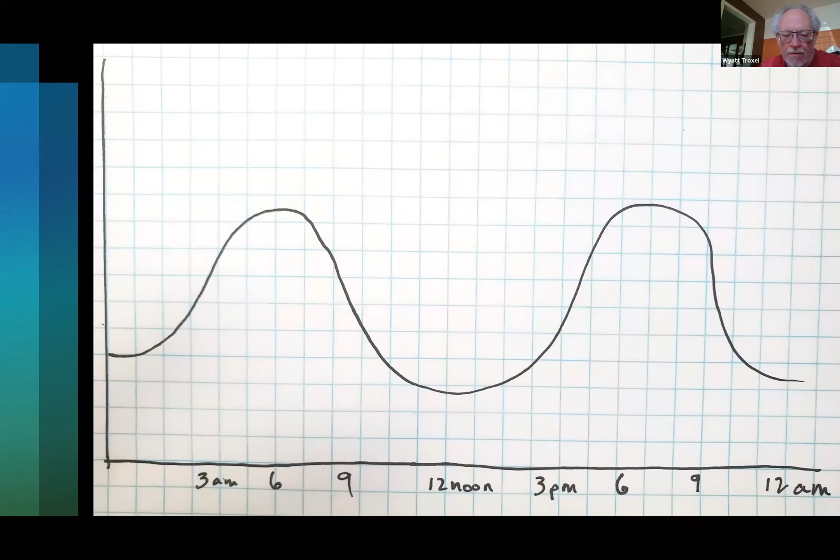That's the water flow carrying stuff to the treatment plant - BOD, nitrogen, metals, salts, all kinds of things, whatever gets poked down in the sewer and whatever's coming in through the carrier water. So the plants, for the most part, are designed for a hydraulic curve - an average, a min, and a max. This curve can be daily or seasonal. We have all kinds of flow curves. What we need are load curves.

I think we should intuitively understand that the concentration in that flow is not the same all day long. It's influenced by the demographics, the geography, and the habit patterns of the community. So we all think about 2 o'clock in the morning, the little old men get up and pee, and then later they poop. So you have a higher concentration of ammonia coming in the early part of the flow, then likely a higher concentration of organics, BOD, coming in later. I think intuitively we understand that, but I doubt very many agencies are fractionating their sampling to determine what this curve looks like.

Then it drops off in the afternoon. The lower flows are what we'll just call urban drool - it's leaky toilets, cooling water, whatever drainage might be occurring that's not really conveying sewage. So concentrations drop, and that impacts the treatment plant.

Then in the late afternoon and into the evening, in most systems - not all - you'll get another curve that is similar. People come home, they shower, they bathe, they cook, they wash, they do all kinds of things. So the nature of that bump in the curve could be totally different than the nature of the first curve. The question is, what do you know about that? Because that second bump in the curve is usually when you're paying more dollars per kilowatt to treat.

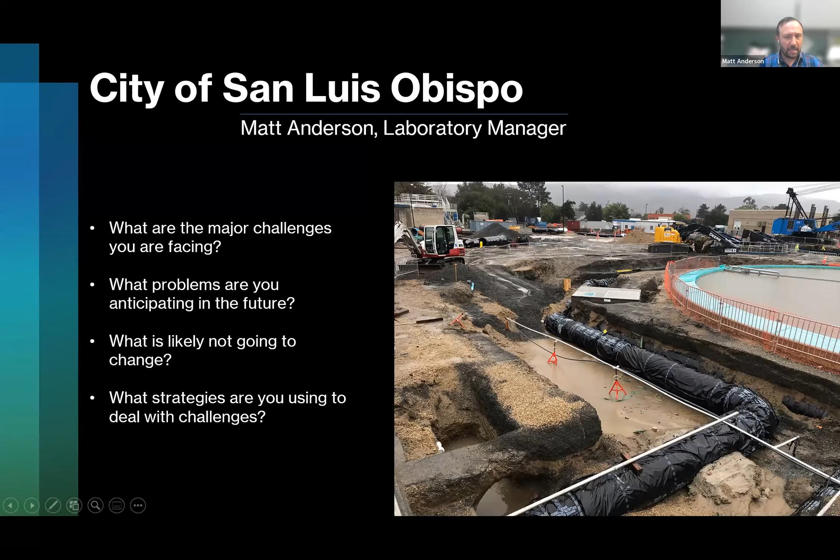The time schedule order is a tool to help us during this time, and we're having trouble meeting those limits. So, do you want to go to the next slide? You can back up one.

Right, so just a quick project timeline. This has been in the works since we received that new permit in September 2014. I just got a great email from my boss with the process design looking at the ammonia loading. The process design was last updated in 2018, and looking at our water quality data, we're starting to see the mass loadings of the new facility, which is designed for 6.1 million gallons per day. We're seeing that mass in the 3.3 to 3.5 MGD range. So, go to the next slide.

One great thing about our facility is the lab has always been hand in hand with the operations team. We support them daily with process control data, and also with regulatory sampling and analysis. The graph on the left is our process control sample where we look at the composite nitrate concentration.

If you look, we start in that 2010 range, and you see the swings go from about 10 milligrams per liter to 35 milligrams per liter nitrate as N. Then as you creep to the right to 2022, which I've snipped out here for the second graph, now we see a range anywhere from 40 to 60 milligrams per liter of nitrate as N. Go to the next slide.

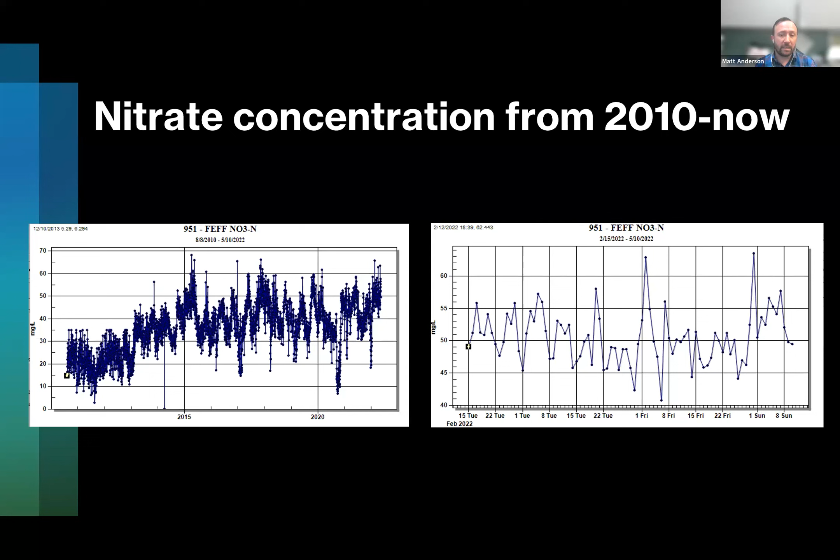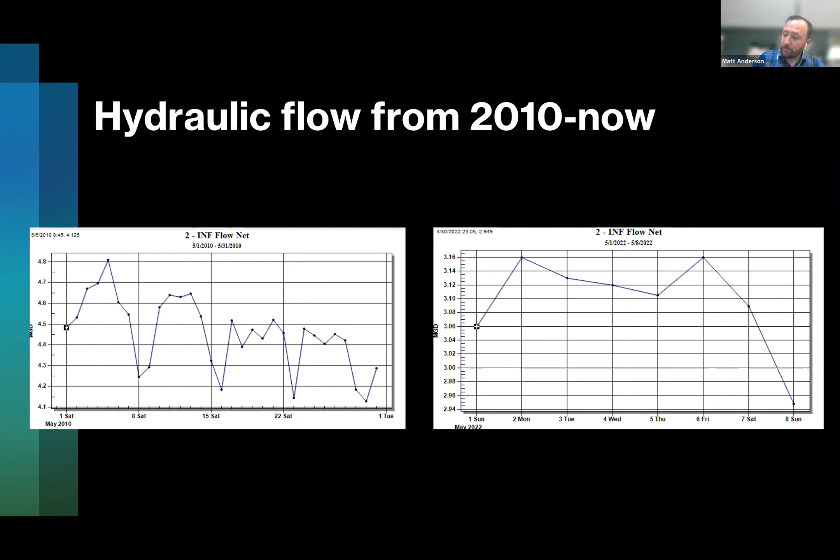So that's kind of our challenges at the treatment plant. And like I said, we're actively working on trying to gain compliance until we can have the new facility ready to go to meet our new nitrate limits.

So, the fun one here - this is a pipe from our lift station that was constructed in 2014. We had a complete pipe failure in 2018 with a replacement in 2019. The 2019 work was investigated in 2021, and it had to be warranted and replaced within 2 years of shelf life.

Got to give credit to our wastewater collections team - they dug in to ask why. We did some hydrogen sulfide studies. At the lift station where that ductile iron pipe was, we've seen concentrations of hydrogen sulfide on those diurnal swings that Wyatt showed us exceed 170 parts per million.

So the team then asked, why are we seeing those increased hydrogen sulfide concentrations? The upstream piping had a long retention time, as Wyatt mentioned, and you start to see those unsavory conditions that we don't want. Once again, why do we have the long retention times? The why on that is we had a 10-inch pipe that was designed for more flow, which ended up being oversized, and we just don't have the water to move everything downstream.

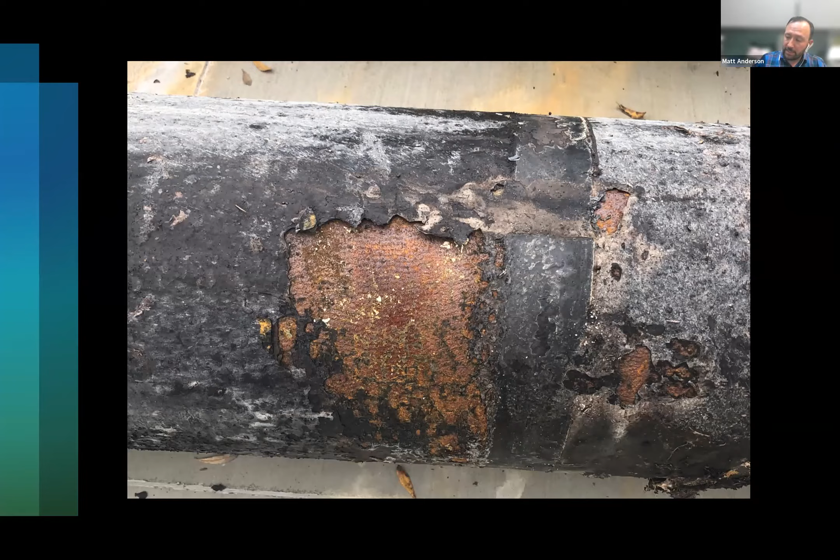Next slide, please. As Jamie was trying to say too, what are we doing about this? These changing conditions - I have to give a lot of credit to our current and past supervisors, Chris Lehman and Patrick McGraw.

This has been the next step that's gone on this year, and I have to give credit to Patrick McGraw. They were able to take the real-time data provided from PG&E to see the energy usage at the plant. This connects that granular data of how they operate the facility to the energy usage the plant sees, to the peak usage, and ultimately how that affects our PG&E bill that we see every month. Just trying to keep that cause and effect in mind, and how to most efficiently run the facility.

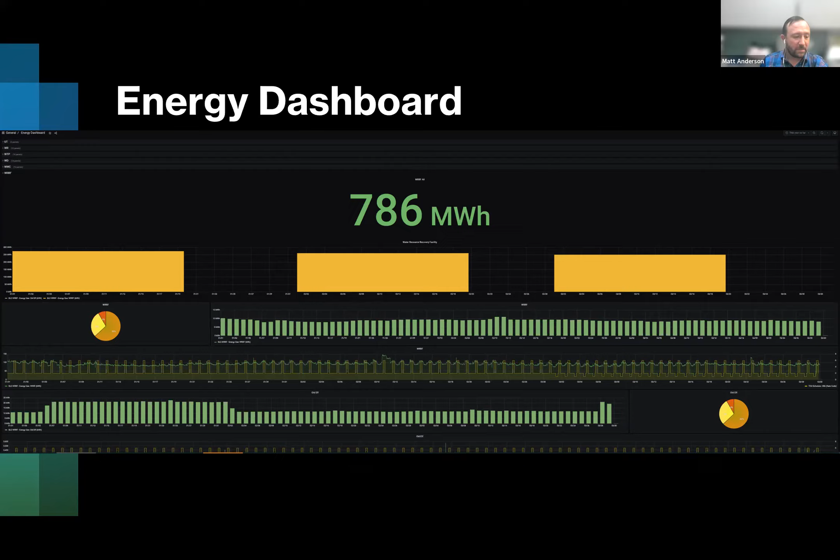Now Vince, over to you. All right, hello everyone, I'm not sure if you guys can see me, but anyway, my name is Vince Inez. I'm the wastewater utility manager for the city of Ventura.

Ventura is located about an hour north of Los Angeles, just between Los Angeles and Santa Barbara. We're right on the coast, a coastal community, with a population of roughly 100,000 people. The collection system is made up of roughly 310 miles of sewer pipe. We have 11 wastewater lift stations, and our average daily flow right now is about 7.5 million gallons per day.

Our wastewater plant consists of primary treatment. From there, we go to aeration basins for nitrification and denitrification, followed by secondary sedimentation, tertiary filters, and then some polishing ponds. Our final discharge location is the Santa Clara River estuary.

We do have a recycled water program where we provide recycled tertiary treated water to the golf courses in our city, and we also have a recycled water program for residents. Residents come into the plant, load up their tanks, and are able to take that water home and irrigate their lawns or use it for other agricultural uses.

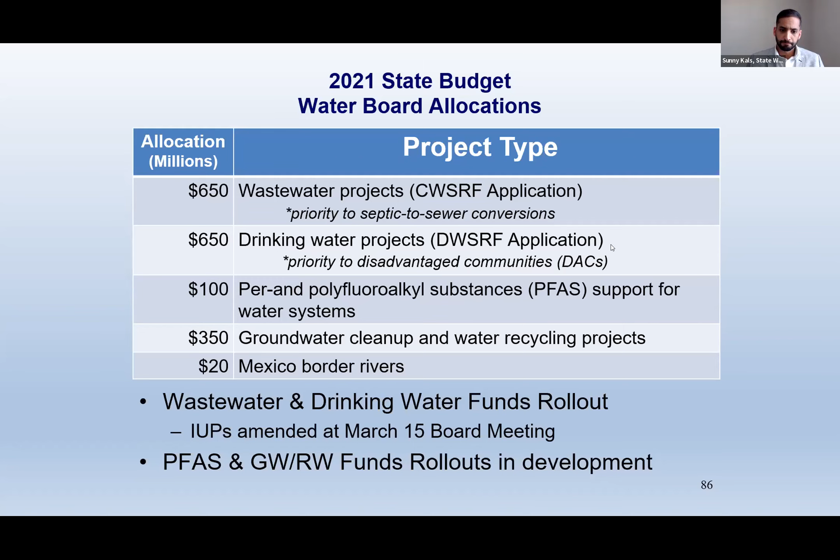Essentially, the funding will be made available once we request it in our application for the federal capitalization grant, and that is always included in the Intended Use Plan, or what we call the IUP. The next IUP will be released sometime in July. Currently it's being drafted.

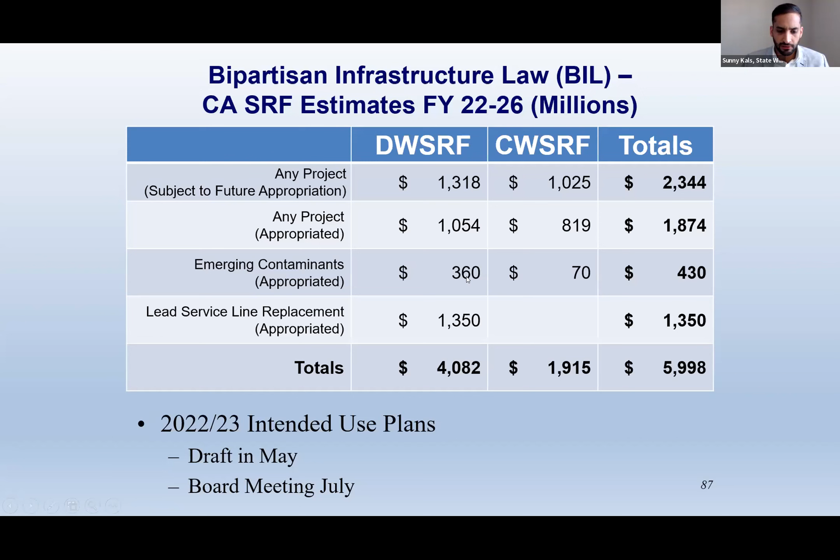I also wanted to mention that with the BIL came the Build America, Buy America provisions, which will be a heavy burden for some agencies. So if you are looking for clean water SRF or drinking water SRF loan funds using the federal appropriations, BABA will apply to your projects. It's definitely something to think about when developing your plans and specs for any future projects or applications. I'm sorry that was a little quick, but thank you.